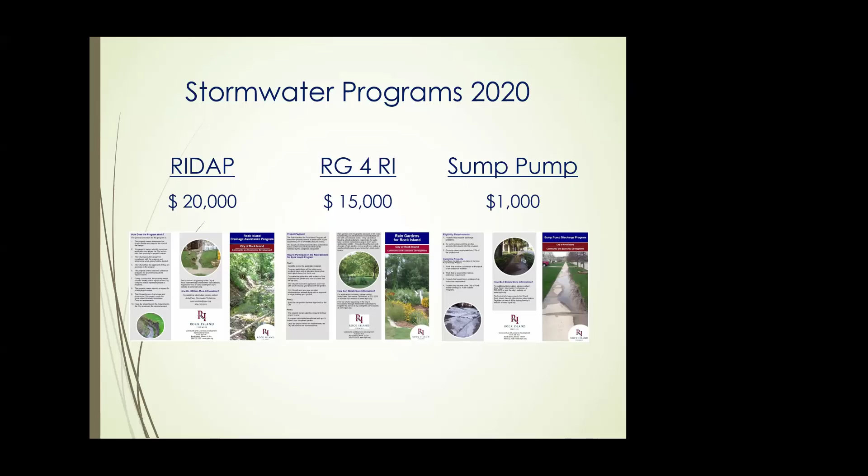We'll start out with the Drainage Assistance Program, which is pretty popular among our residents. Here's just a page of our handout. I'll go over how it works and everything. What we're trying to do with this program is address damage on your property caused by somebody else's stormwater. Most of the time, those are creeks and ravines in the backyard, but not always.

Just a quick brief history. The RIDAP program was created around 2003. They all were, I'll tell you that right now. The programs came into play when we had to start complying with EPA regulations, and they were a way we used for our utility that got passed, our stormwater billing utility. So we created these 3 programs, kind of like an olive branch to the residents.

We had a lot of resistance when the utility passed, it was before my time, but from what I understand, we had a lot of resistance from residents and a lot of concern that we were charging them for rain, for lack of better terms, but we all know that's not what we were charging for. It was for EPA compliance. So we developed a few programs to say, we hear that, you're concerned about it, but we will give back in some way. These are what these programs are about.

An ideal project would involve a neighborhood stream stabilization project, for example. I've only seen a couple of those. Most of the time, they're individual property owners calling up concerned about the creek. Oftentimes I'll get a call from a resident: the creek behind my house is eroding, you need to come and fix your creek. As I think probably a lot of people here know, we don't own the creeks. We don't have any easements or right of way unless there's a utility across them. We rarely own anything that the residents are concerned about. So it's nice to be able to walk up to a resident and say, well, we don't own this property of yours, but we do have a program that we can help assist you with.

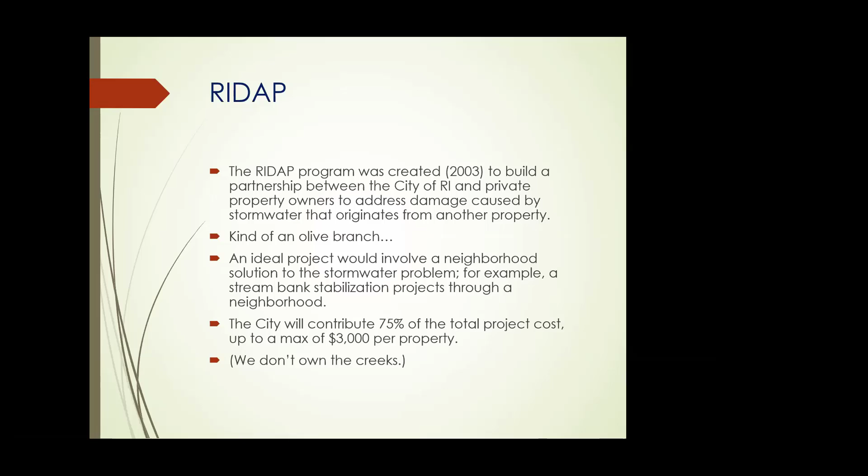The city contributes 75% of the total project costs up to $3,000 per property. So it's pretty popular. Let me go to another slide real quick, but this is a good example of something that I would typically see for a RIDAP program. I was not involved in this one.

You're putting all this water through my yard and it's causing erosion and I want it fixed. So this is where the program comes into play, and we'll get back to that.

Eligibility: the big one is that the water has to be coming from somebody else's property. We're not going to fix your yard or your creek if all of your downspouts are running to it and creating your own problem. The projects must be somewhat permanent. I know with Mother Nature nothing's really permanent, but we don't want an application for somebody who wants to try something, and then next year if it doesn't work, come back to us for another solution. We want this to be a proper stabilization method, or some type of permanent solution to their problem.

Obviously, we must accept the designs. We don't design, but we will make sure that it makes sense. For liability reasons, we can't design the project. We're just the middleman between the contractor and the homeowner, unless the homeowner wants to do it themselves, and I'll get into that in a bit. But we don't do any design work. And then the contribution is 25% from the property owner.

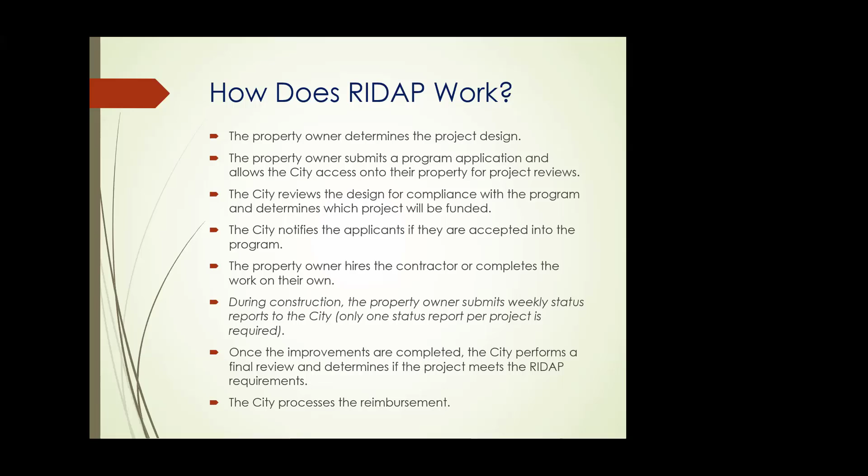This slide basically says, how does it work? You just have to get approved. I'll come out, I'll meet you, we'll talk about your project, we'll talk about possible solutions and ideas. I have no problem giving ideas out or putting people in contact with contractors who do this type of work. Once they get a submittal to us that makes sense and everything's signed, then you get the formal approval. I'll go out and see that the project's completed and then reimburse you, hopefully within a week or two later.

As I mentioned before, if you can do the work yourself, we're not going to pay you for labor. Everybody's labor, depending on who you ask, is worth $10 an hour up to $100 an hour. So if you want to do the work yourself, which some people do for small projects, we'll reimburse you on equipment rental and material cost. If a contractor performs the work and invoices you as a proper contractor, we'll pay them for their labor.

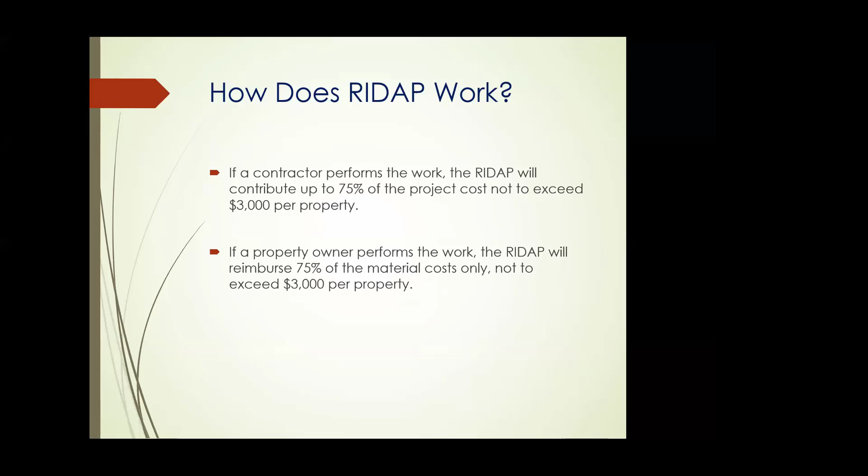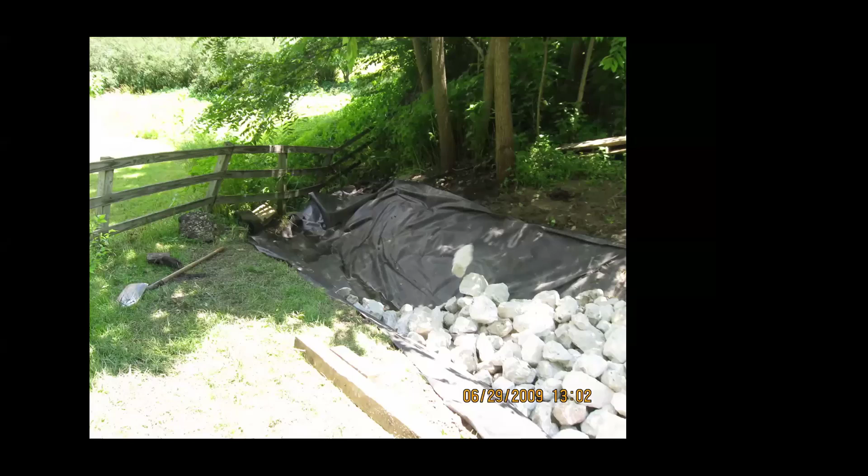The first picture here: he was approved for the program. He put down some armoring mat or material, and then some properly sized riprap on top of that. You can tell the channel has been widened a little bit too. It's not just a vertical drop off, it's more of a V or U shape on the bottom, and that helps tremendously. So when you look at an after picture of what this property owner was able to accomplish using our program, in my opinion, he turned a liability into an asset.

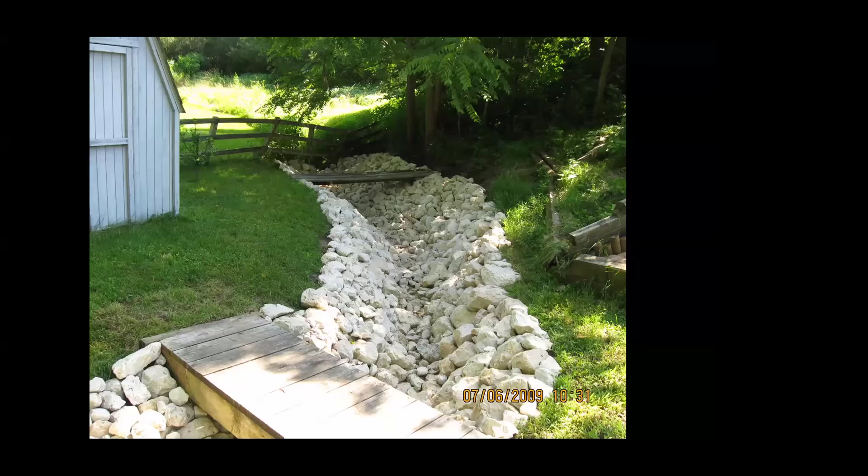I think it's very simple, but very elegant. It's a good way to address any erosion that he was causing, or that was being caused on his property from somebody else's stormwater. Couple more after pictures.

So this is a typical RIDAP project, and you can tell he went all the way. The damage is already done to the land, so I don't know what he did with that fence eventually, but as you can see, it's stabilized, and it's a little more aesthetically pleasing from that.

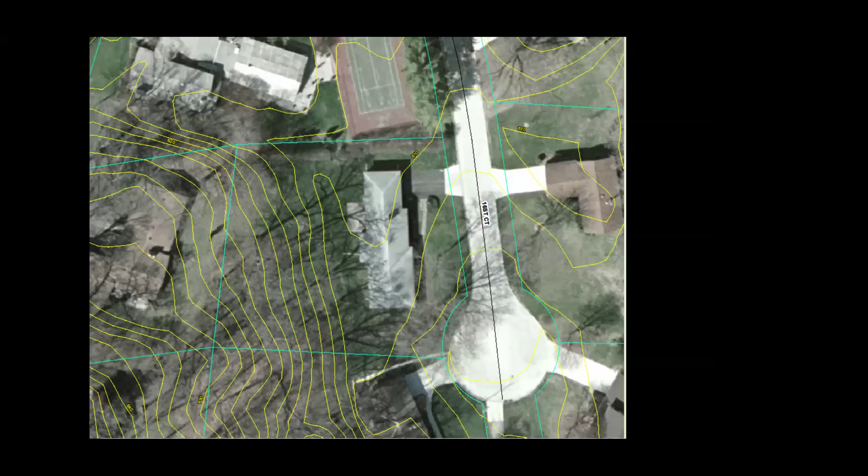Here's another example of a RIDAP project. I'll explain what we're looking at here. You can see the white house just below, south of those tennis courts. The topography lines are all in yellow, and you can see the whole neighborhood was pretty much running towards this house during any rain event, whether it was light or heavy. They would have significant water in their backyard and pretty much rushing towards their house.

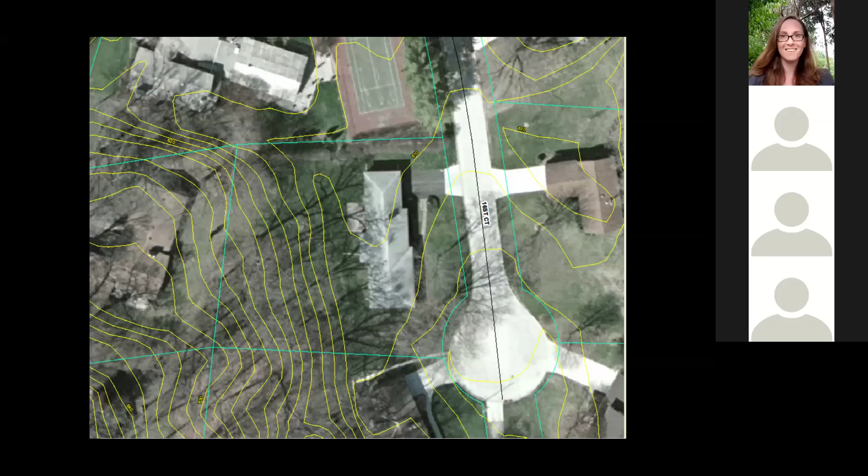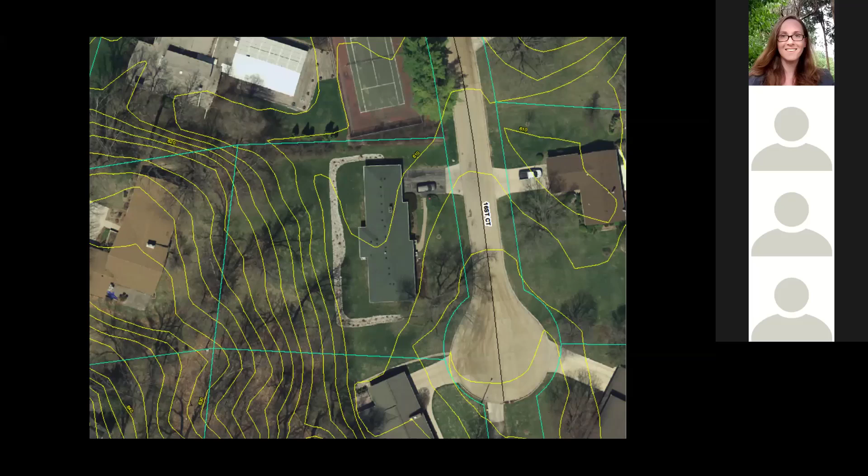Here's an after photo, you can see the white C shape around their house. There was a lot of discussion about how they should address this water, whether to build a wall around it, which seemed silly - you don't want a wall in your backyard. So they decided to dig a trench and run all their downspouts into it. You can see downspouts heading into this trench around their backyard, and to the left, it's all sloping directly towards their house. During heavy rains, water was rushing in toward those windows on the right-hand side, causing a headache.

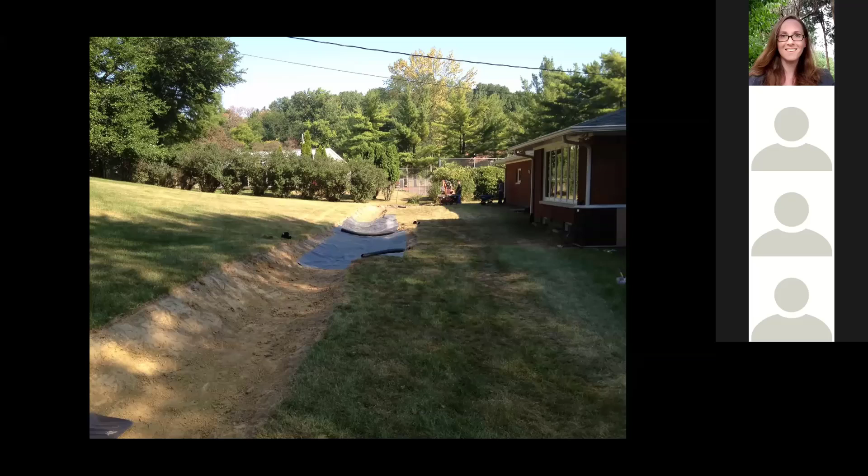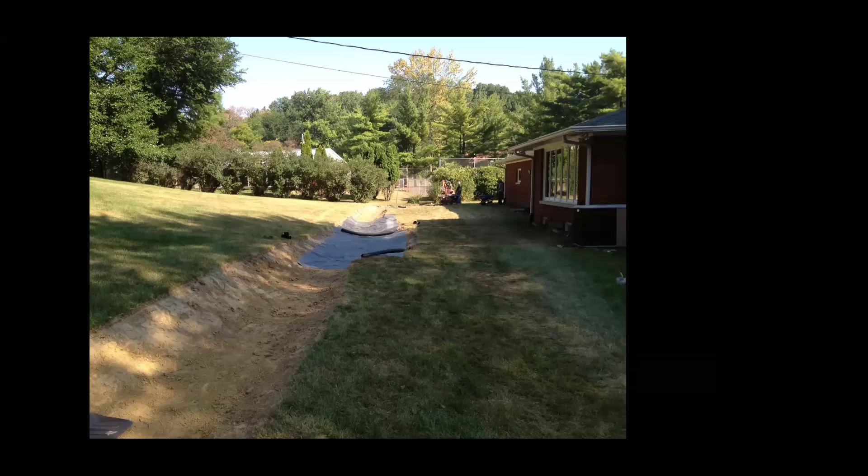Another nice thing about this program is coming up to a home. When you buy property, you don't want to roll your eyes when somebody complains about water rushing downhill, but sometimes that's just the case. It's very nice to be able to offer assistance to people who might have overlooked that when purchasing a property. There are lots out there that probably shouldn't have been developed - I'm not saying this was one, but I've run into that many times.

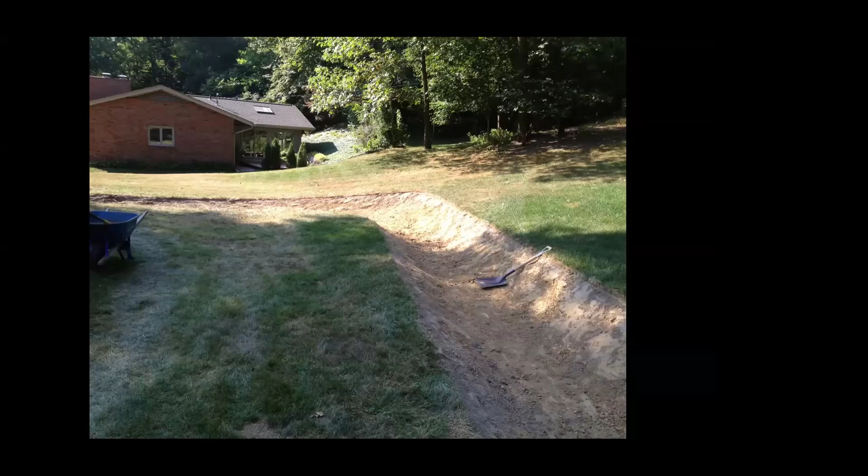You can see the trench being dug. They put down some fabric as well. Here's another angle of the downspouts being tied in - it's a very well dug trench. They've armored it too, put in some grasses, and added a few more plants since then, which is good in my opinion, just to stabilize it.

You can see what happens now is the water goes into that trench. It's nicely armored and deep, and it diverts the water along to both sides of the house. I like that on the corners they put some plants for additional stability. Here's the south side of the house, one more downspout tied into this trench.

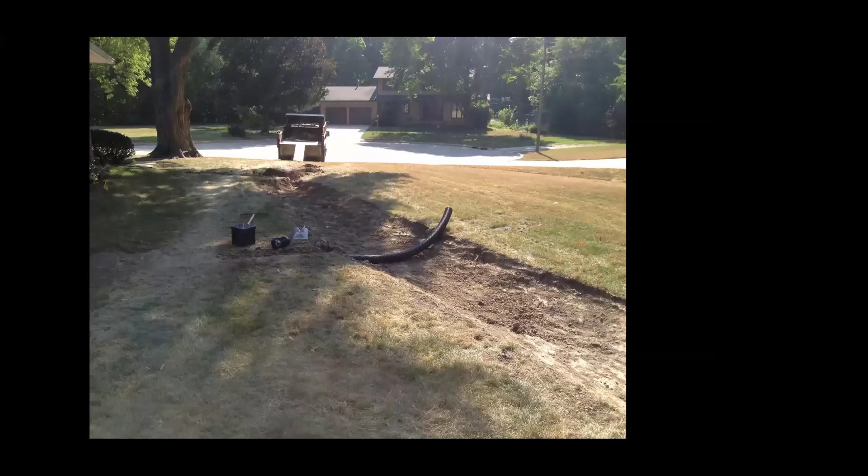You can see on the bottom left there's a black overflow box. If the trench ever fills during really heavy rain, there's probably still some water getting into the home, but this is designed to alleviate things during smaller or moderate rain events. Water can come out of that overflow box and head out towards the street where it should be in the first place, in a much more reduced fashion, so there shouldn't be any erosion. It disperses, comes up, trickles along the rocks and out towards the street, even during the heavy stuff.

This was done - I don't have the exact date, but at least 7 years ago - and we've never heard back from the resident, so we believe everything worked out pretty well.

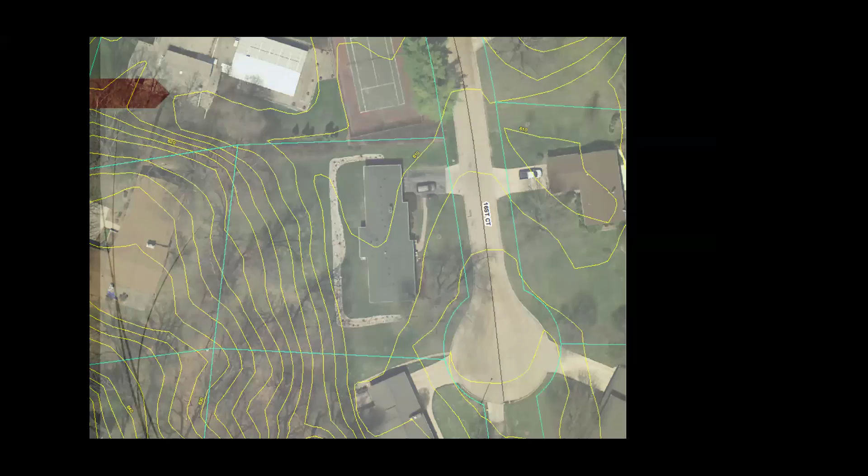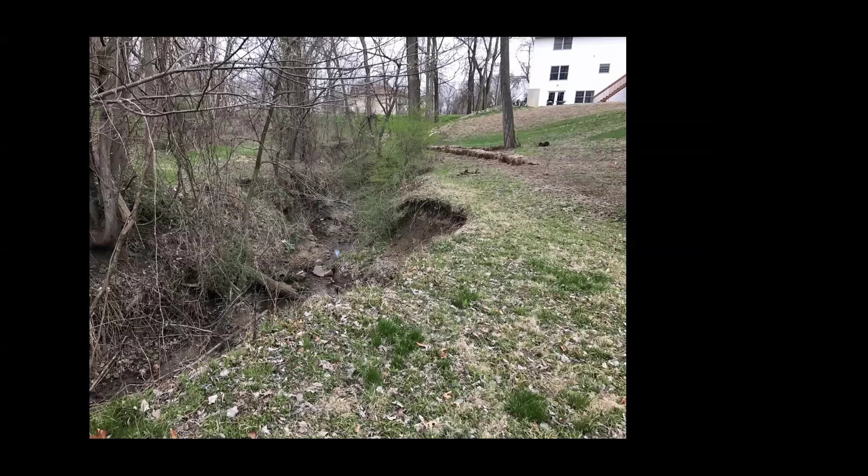Here's a major creek project we had. A resident here had a bit of an unusual situation - the white house up in the corner had well over an acre, maybe two, in the middle of a neighborhood, with a huge ravine flowing through it. You can see in this slide it was kind of a liability with little kids running around and playing, so he just wanted to do something to address it.

And although we only provided a very small fraction of what this total cost ended up being, he has gone on record to be very grateful just for the education we were able to give him and the people we put him in touch with, a really good contractor who does excellent work. He said that information was just as valuable as the $3,000 we gave him.

He had originally, from an engineering background, thought he was going to have to put gabion baskets or some type of heavy duty structure along those walls to stop his land from eroding. And he's just tickled pink. Before, during a heavy rain, he would go out with a little bit of anxiety and watch what was happening. But now he'll sit on his back porch and just watch the river go through his house, and he's loving it.

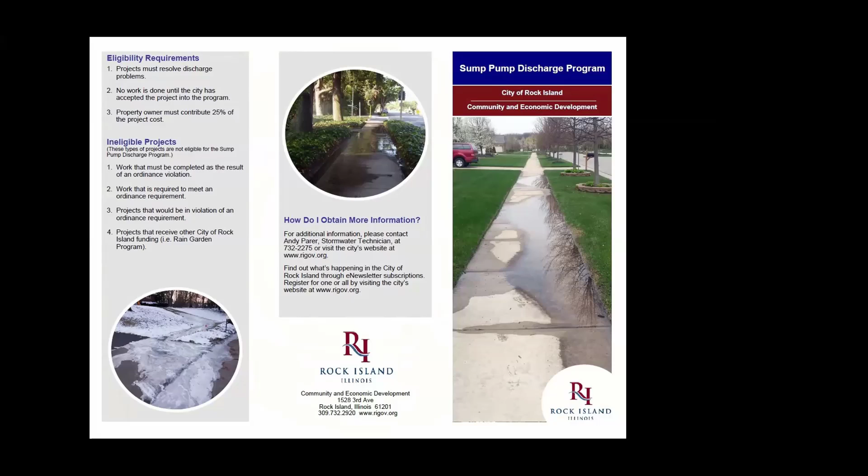The last program we have is one I don't see a whole lot, but it's still active, so I wanted to promote it and talk about it. It's the Sump Pump Discharge Program. The thought behind this program, as you can see on the pamphlet, is to remove sump pump discharge from right-of-ways or sidewalks that would create a hazard. On the bottom left, that's a situation we'd want to avoid, all the ice covering the sidewalks and driveways.

Why this program, let me see here. We will contribute 75% up to $500. The other 2 programs max out at $3,000, this one's $500. I think one of the reasons is sump pumps are usually relatively easy to fix.

If I call up a homeowner and say your sump pump is making a mess, can we please address it, usually it's okay, I'll just cut it back and let it drain on the grass, and that's a great way to do it. I usually don't hear back from them, and even if I tell them we have a program to help pay for this, they don't want to pay even the 25%.

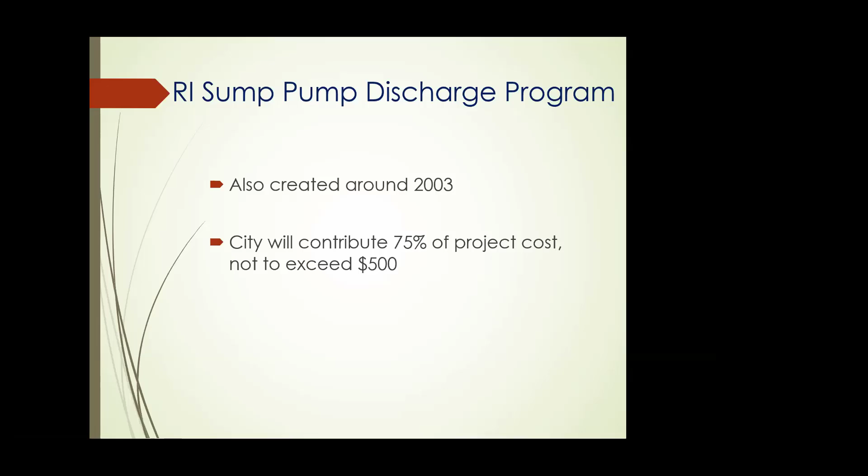Most of them just say no, I'll reroute it, or I'll do something to address my sump pump, and usually we don't hear back. The one time I did use this program in my 10 years here was a gentleman who had an underground spring under his house, which is very common. If you know Rock Island, up by the Saukie Golf Course area, there are a lot of underground springs. This gentleman wanted to use this program to tie all of his sump pumps into a catch basin in our street, and we thought that was a great way to do it. It's permanently resolved that issue completely.

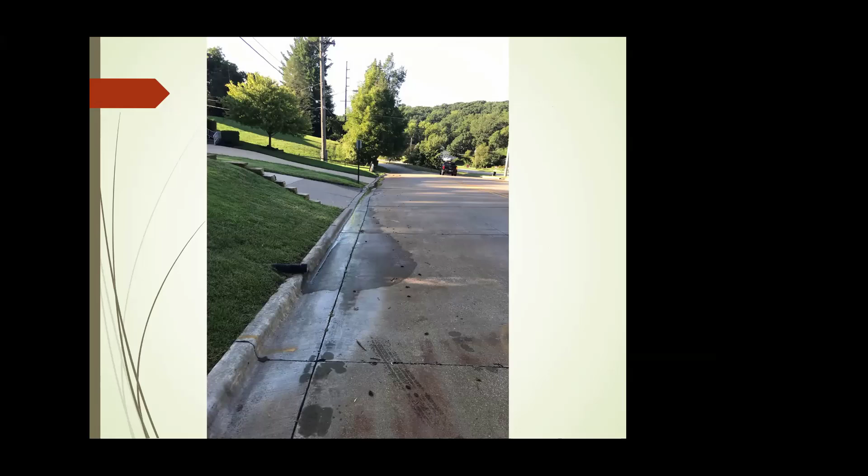Here's a photo of three different sump pumps. I know you probably can't see them all the way down there, but this would flow 24/7 all year round until we dug a trench behind them and tied them all into the back of a catch basin. So ideally with that program, which wasn't too expensive, especially if everybody gets a $500 reimbursement and they all pitch in on the boring costs, it's typically not that big of an endeavor, or it's doable for the pocketbook, especially if they have a year to prepare for it. So yeah, lots of different ways we're addressing stormwater and trying to improve the quality.

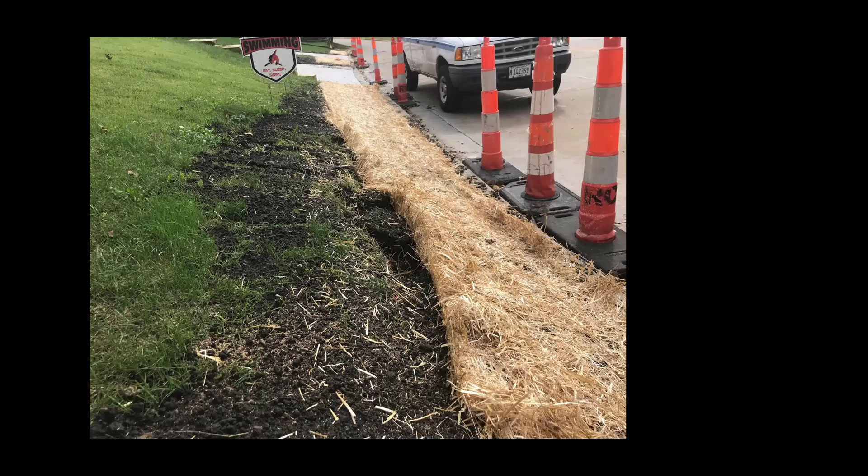I know I kind of talked a little fast, I'm sorry about that. I have my information right here. I'm happy to answer any questions, so please reach out for anything.